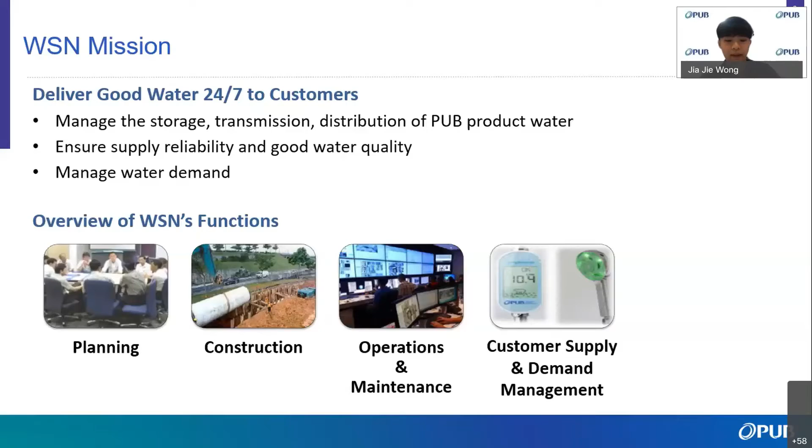So for a start, allow me to share with everyone some background of WSN. In WSN, our mission is to supply good water 24/7 to our customers. We manage the storage and distribution of PUB product water from our service reservoirs to our customers, ensure supply reliability and good water quality, and manage our water demand. So our core functions cover the planning and construction of our operations and maintenance, such as attending to customers' feedback, and lastly, managing customer supply and encouraging water conservation.

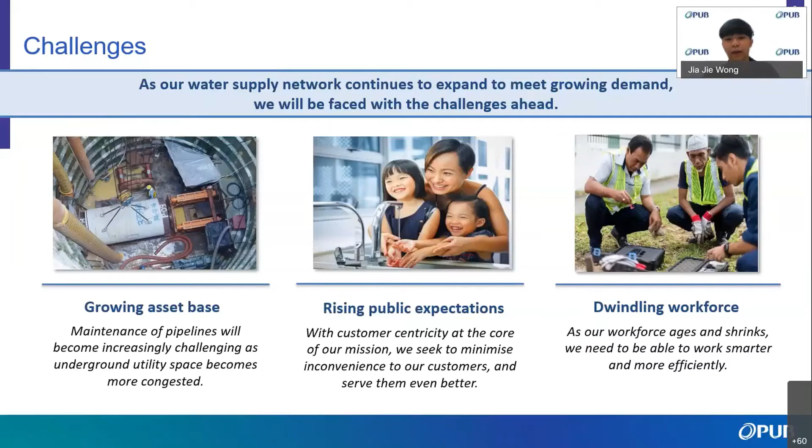So as WSN advances in our mission, there are challenges to overcome. Firstly, as we lay more pipes in more congested underground space, it gets more challenging to repair the pipes when they leak. Secondly, for us to meet rising public expectations, we need to constantly improve our service delivery by minimizing inconvenience to our customers. Thirdly, as our workforce ages and shrinks, we need to work more efficiently by leveraging on technology.

So to cope with the challenges ahead, we have developed a smart water grid vision which focuses on 5 key pillars to help us serve our mission holistically and effectively in years to come.

So the first is on proactive management of our assets. We try to know the health status of every stretch of our pipelines so that before they fail, we can act.

Secondly, with a reliable digital twin, we can assess the impact of wide-ranging what-if scenarios to help us achieve greater optimization in network planning and operations.

Thirdly, the focus of intelligent command and control is to have full awareness during incidents for effective response planning and resource management. Fourth, on smart work processes, given our shrinking pool of manpower, it is necessary to enhance efficiency across all aspects of our work through digitalization, artificial intelligence, and automation.

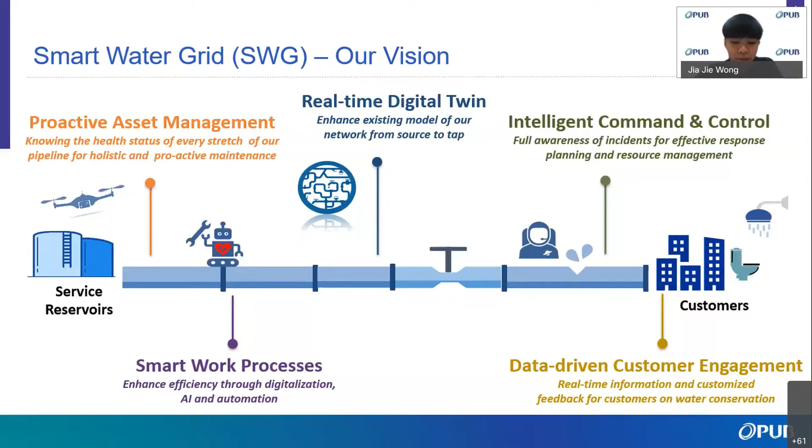Finally, we need to engage our customers based on a data-driven approach to provide them with real-time information and customized feedback such that they can make water conservation part of their daily lives.

So with reference to the 5 key pillars in our smart water grid, we have identified a number of interest areas for today's sharing. There are technologies in leak detection, water quality management, and water demand management.

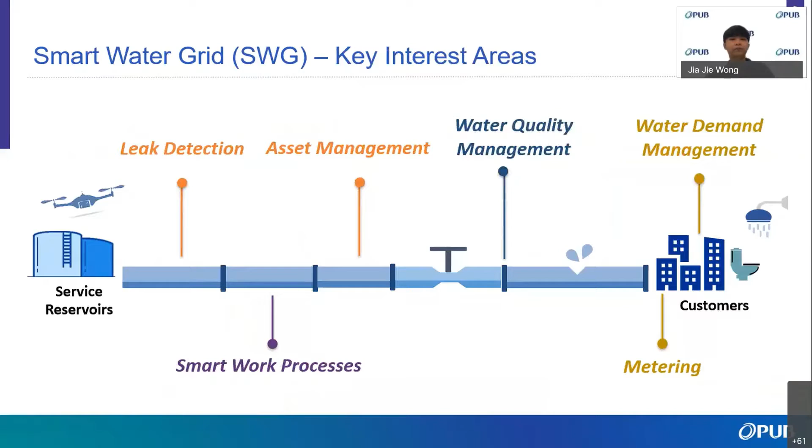So before we move into the interest areas, perhaps I'll first give a brief introduction to our real-time digital twin.

So our smart water grid journey began when we installed sensors across Singapore for real-time monitoring. To date, we have installed close to 350 sensors in our potable network island-wide, monitoring water pressure, flow, and water quality in real time.

So the sensors transmit the monitoring data wirelessly to our back-end WaterWise system for analysis. And if the system detects any anomalies that may affect our supply to customers, alerts will be generated, allowing WSN to respond, investigate, and remedy the problem quickly.

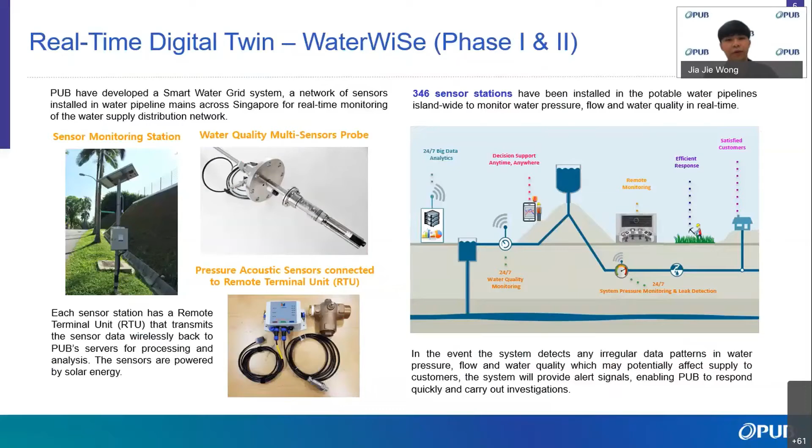The WaterWise system is equipped with a range of capabilities such as pressure monitoring, demand prediction, pipe burst detection, and pipe stress.

So the most handy function of the system is the hydraulic model, which serves as our digital twin. It allows us to simulate our valve operations, understand the potential impacts, and mitigate them beforehand. Coupled with institutional knowledge, we are able to formulate well thought out operational plans with WaterWise.

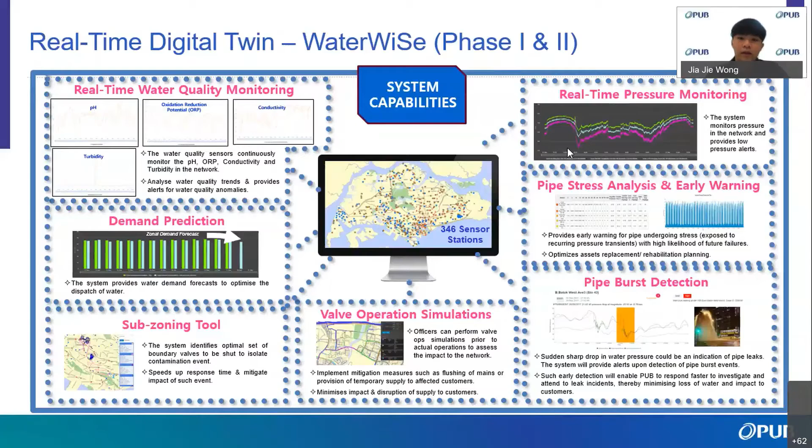So with the success of the system, we continually work towards enhancements to serve our operational needs. In fact, we are already developing and deploying phase 3 of WaterWise, with new functionalities to support the 5 key pillars of our smart water grid.

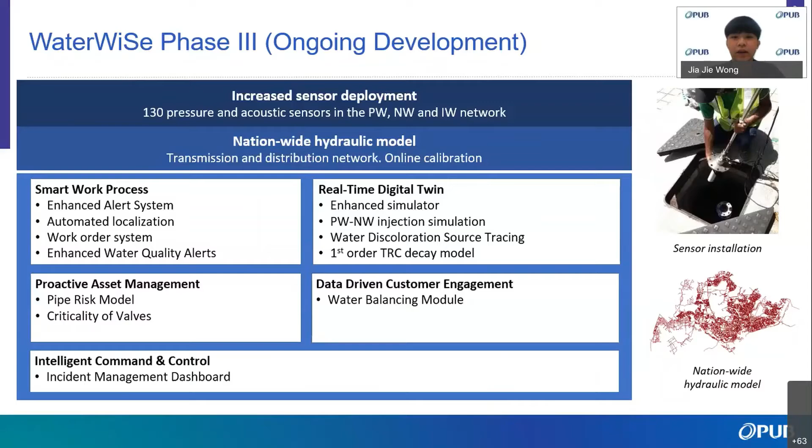The new and advanced modules include smarter work systems like enhanced alert system, enhanced valve ops simulator, water quality management modules such as discoloration source tracing tool, first order TRC decay model, and asset management tools such as pipe risk model.

Part of our developments, we are also integrating WaterWise with PUB's incident management dashboard to assimilate all operations critical information from various PUB systems under one single platform for greater situational awareness during incidents.

So WaterWise will serve as the intelligence engine, providing recommendations for field crews to systematically diagnose the issue. Now we'll move on into the main topic for today's sharing, which is WSN's interest areas.

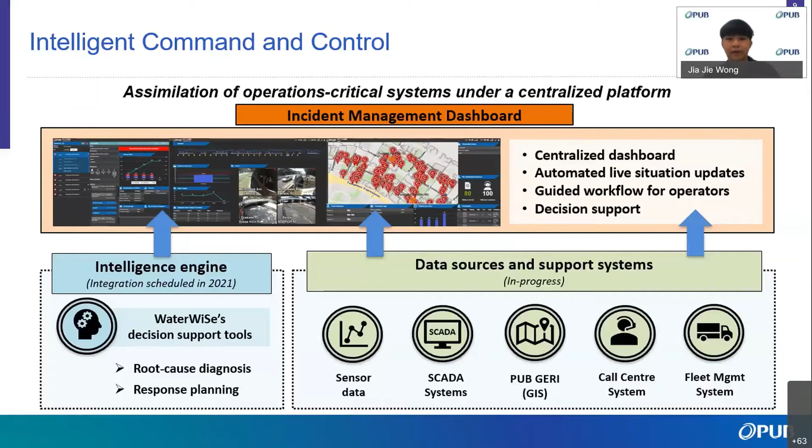So like any other utilities, distribution losses remains a very important KPI for PUB and WSN. Distribution losses can be categorized into two main types: real losses and apparent losses. So real losses center around actual leaks, and WSN has invested in advanced leak detection technologies to detect them quickly and precisely. Another is asset management, whereby WSN has also been exploring alternative materials, better repair methods, and data-driven renewal prioritization.

Apparent losses center around metering inaccuracies, and WSN is also making efforts to adopt advanced meters and leverage on data analytics to cut down on meter inaccuracies.

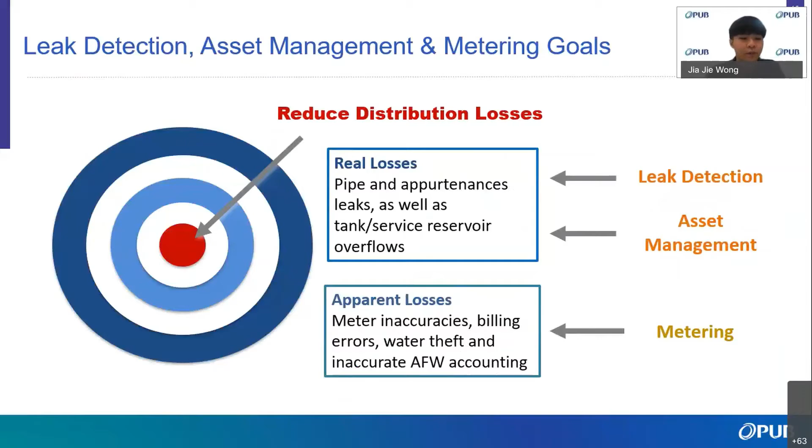Here are some of our leak detection initiatives. We categorize them into three key interests.

Data-driven leak detection: we are looking into using monitoring data and hydraulic models for real-time detection. We are also developing virtual DMAs. Moving ahead, WSN is also exploring the possibility of implementing DMAs and PMAs.

For invasive technologies, we have implemented SmartBall in our critical pipelines for detection of minuscule leaks under live conditions. We are open to other advanced invasive technologies such as pipeline robots that offer better accuracy, affordability, and speed in picking up leaks.

For non-invasive technologies, we have mobile phone sensors that can help operators discern between leaks and non-leaks, permanent sensors on our critical mains that monitor nighttime acoustics, event-triggered sensors, as well as plans to trial cameras with video analytics capabilities and fiber optics technologies for detection of leaks.

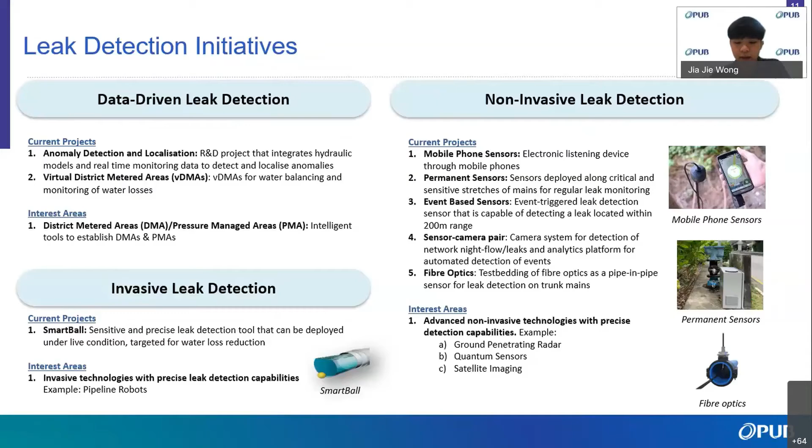We are also keen on new and advanced non-invasive technologies such as ground-penetrating radar, quantum sensors, and satellite imaging that can help us effectively identify our leaks.

Asset management: we are looking at improving our pipelines from the construction stage, to operations and maintenance, and finally to renewal.

In the design and construction stage, we're exploring the use of alternative materials for better design, greater ease of maintenance, and longer life.

We're currently trialing RC cladded pipes with granular blast furnace slag for pipelines, as well as thermoplastic coating on our butterfly valve gearbox. For operations and maintenance, we are looking into new and advanced repair methods.

Currently, WSN is trialing technologies such as new clamps and couplers, insert valve technologies for transmission mains, pipe freezing technologies, and intrusive repair methods. Most importantly, these advanced repair methods have to offer better performance, cost efficiency, and safety.

For renewal, our focus is on developing a data-driven renewal prioritization plan by coupling risk-based analytics with condition assessment for our three main pipe materials: cast iron, ductile iron, and steel. We have already completed the risk-based analytics and condition assessment for cast iron mains, in-house risk-based analytics for ductile iron mains, and we also have an ongoing R&D project on condition assessment for ductile iron mains.

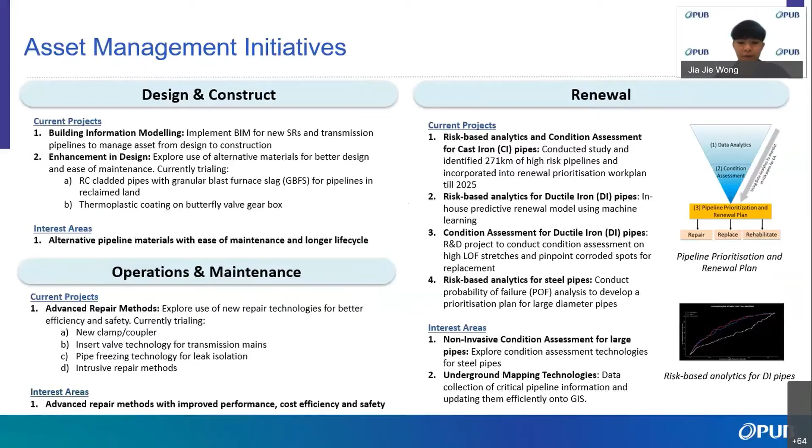For metering, we are pushing out new and advanced meters to improve our AMI roadmap. Plans are already in place to install our first batch of 300,000 smart meters. In the interim, we are also exploring the possible use of static meters to replace our mechanical meters. Soon, we'll be requesting proposals to conduct lab and field trials for static meters to assess their suitability.

Concurrently, we are also leveraging data analytics to gain more insights on our meter fleet. In our upcoming project, we'll be using historical meter read data to conduct analysis and flag out inaccurate meters. In the near future, we are also planning to conduct likelihood of failure analysis of our meters to design a dynamic meter replacement program, where meters will be replaced based on risk level and not by the current practice of replacement by age.

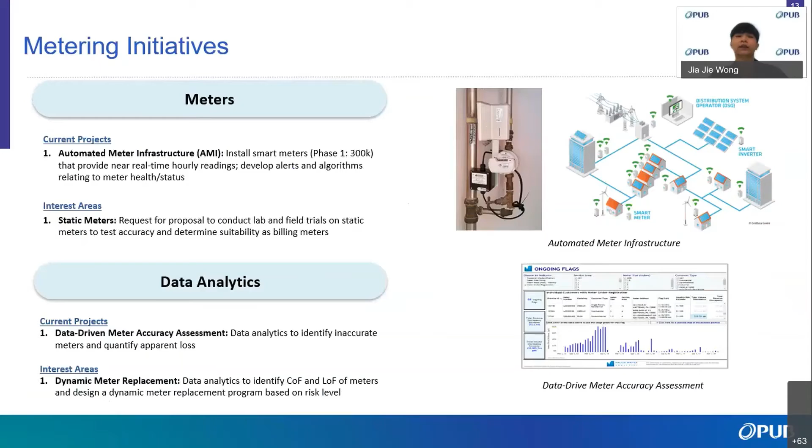So we'll now move on to water quality management. Our goal for water quality management is to ensure that we are able to meet our mission of supplying good water, able to preempt water quality issues, as well as being able to make better decisions in planned works and emergency response. We also aim to meet rising customer expectations, bring better customer experience, and minimize any water safety risks.

Lastly, we also aim to prepare ourselves for the future by being ready for future sources of water, ready for newly detected contaminants, and cut down on downtime of critical sensors as more sensors are installed.

So for water quality management, we are keen on advanced water quality technologies. We have implemented automated grab samplers, mobile water quality analyzers, and also smart water quality analyzers that are able to perform automatic flushing of sensor drifts. We are also currently exploring the feasibility of using monochlorine dosing.

We are also leveraging data analytics to help us better preempt water quality issues. To share, WSN has done some in-house analytics to monitor water quality hotspots as well as discoloration hotspots to better plan a data-driven water main flushing program. Lastly, WSN has also adopted water-efficient flushing technologies such as air scouring and ice flushing. I would definitely welcome any other advanced flushing technologies that can offer higher water efficiencies.

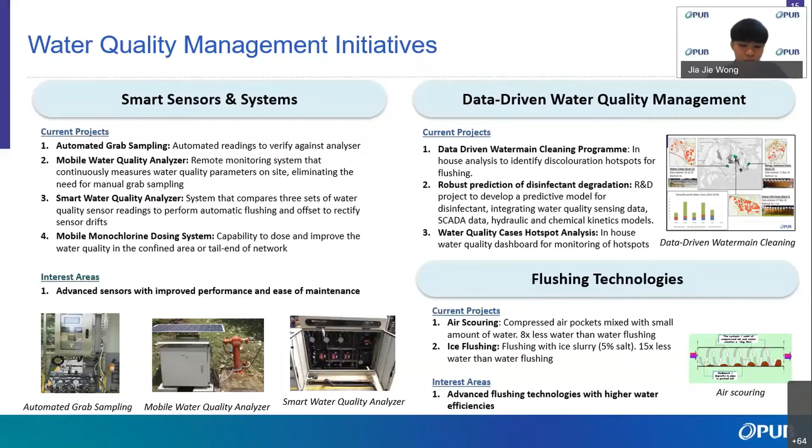As shared briefly at the start, WSN continues to expand and grow our network. We will inevitably be met with new challenges. So today we need to start questioning ourselves: How are we going to manage our asset base? How do we cope with an aging and shrinking workforce? How can we enhance the safety of our workforce?

It is therefore imperative that we start to work smarter to tackle these challenges, to reduce our reliance on human labor and manual intervention, increase our productivity by doing more with less, and at the same time aim to improve our safety and workforce satisfaction. So there are many areas in WSN where we can work smarter, but for the purpose of today's sharing, we'll be sharing on three main areas.

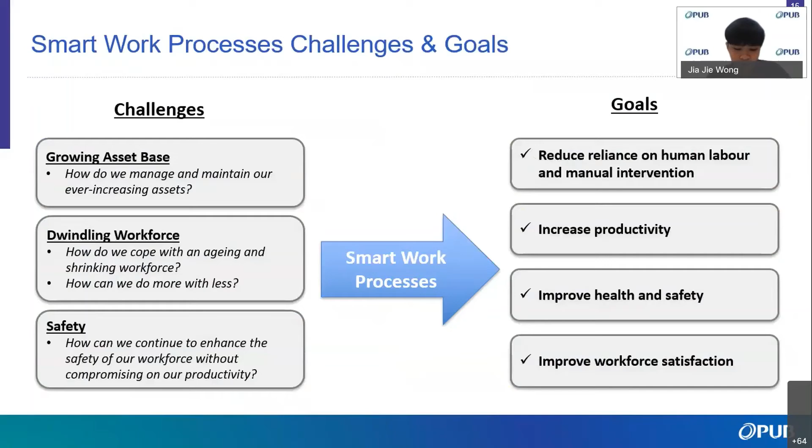The first area is smart sensors and systems. Besides the water quality sensors as shared earlier, WSN has also deployed smart sensors that can predict likelihood of failure of pump systems, offering ease of maintenance and advanced functionalities like online monitoring of pump performance. We will also continue to source for any pump technologies that improve performance and ease of maintenance.

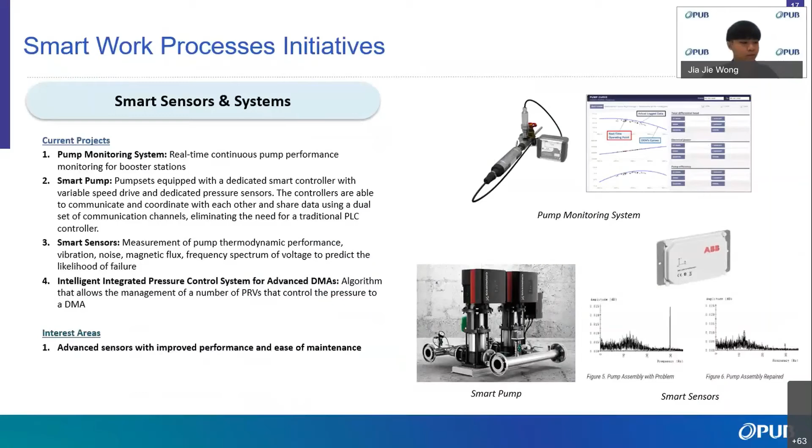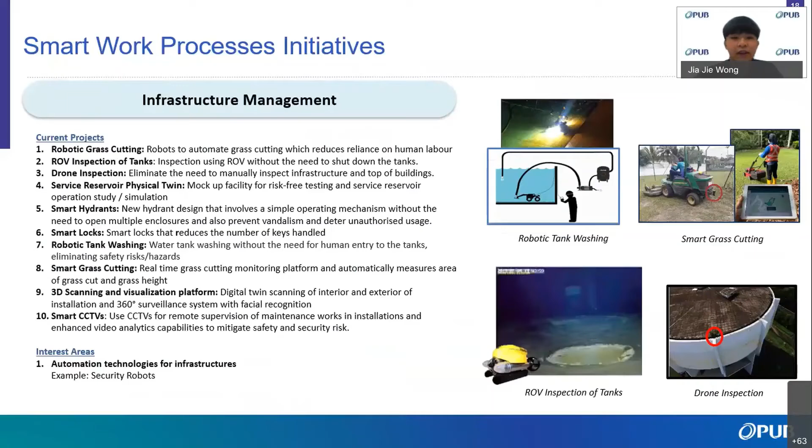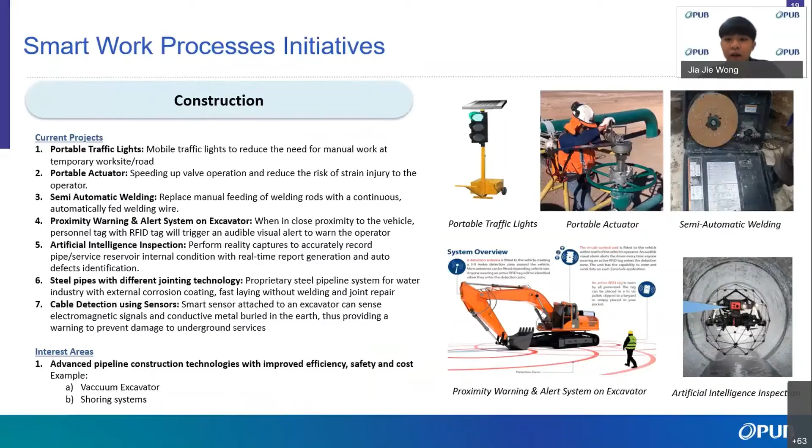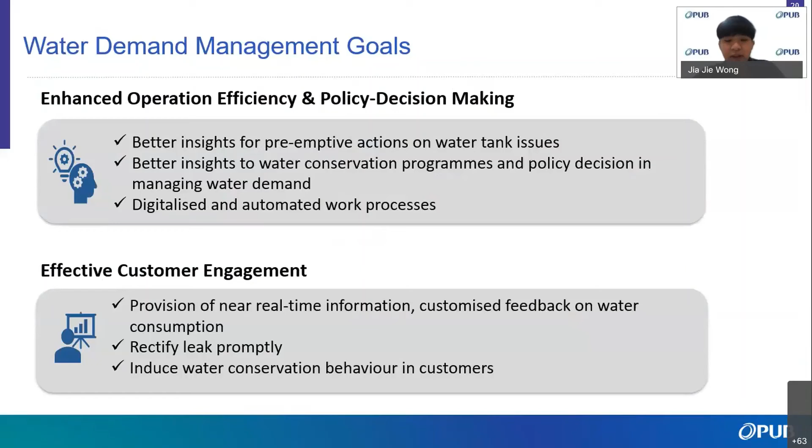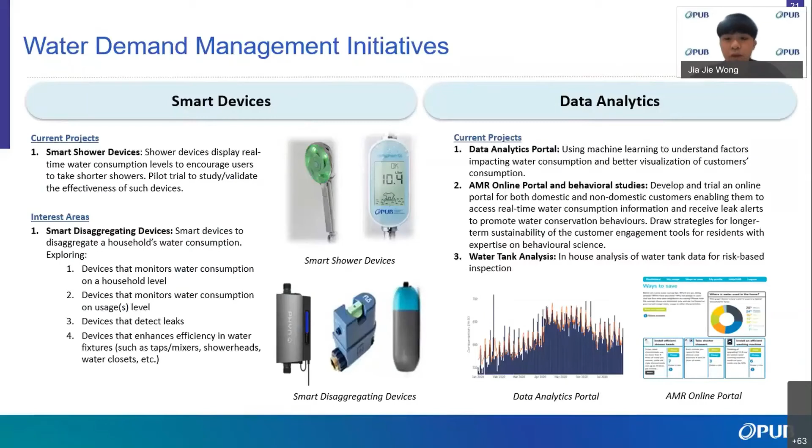So we have now come to the end of WSN, giving everyone a glimpse of WSN's work as well as some of the technologies that we are interested in. Feel free to contact us if you have any proposals. We can link you up.